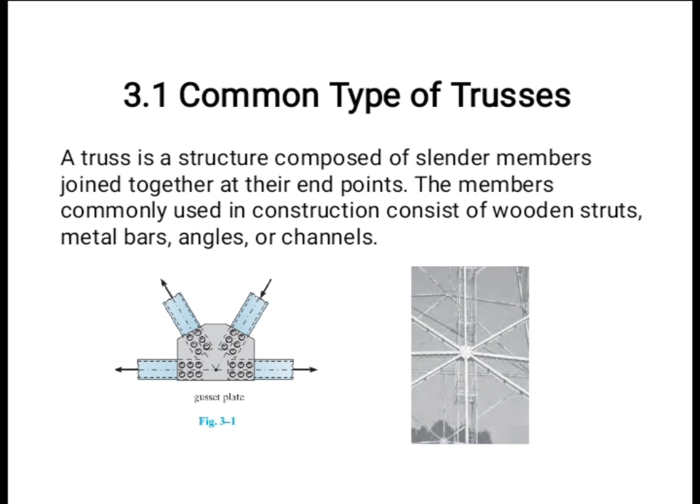The joint connections are usually formed by bolting or welding the end of the members to a common plate called a gusset plate, as shown in Figure 3.1, or by simply passing a large bolt or pin through each of the members. Planar trusses lie in a single plane and are often used to support roofs and bridges. A gusset plate is also used to connect members of the truss supporting structure for a water tank.

Roof trusses are often used as part of an industrial building frame, such as the one shown in Figure 3.2. Here, the roof load is transmitted to a truss at the joints by means of a series of purlins. The roof truss, along with its supporting columns, is termed a bent.

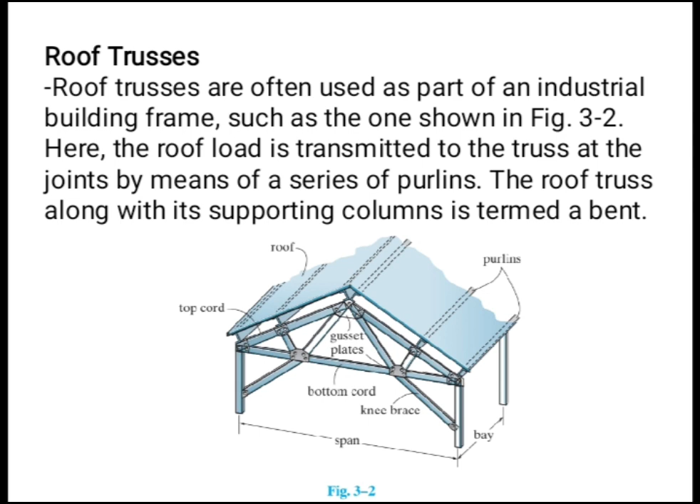Ordinarily, roof trusses are supported either by columns of wood, steel, or reinforced concrete, or by masonry walls, to keep the bent rigid and thereby capable of resisting horizontal wind force. Knee braces are sometimes used at the supporting columns. The space between adjacent bents is called a bay.

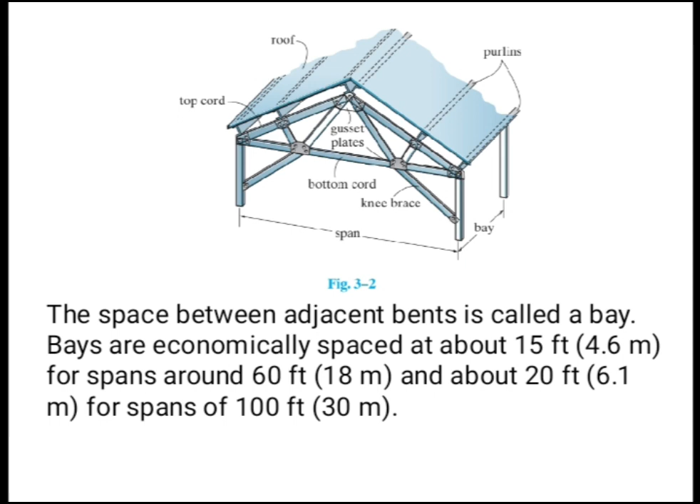Bays are economically spaced at about 15 feet or 4.6 meters for spans around 60 feet (18 meters), and about 20 feet (6.1 meters) for spans of 100 feet (30 meters). Bays are often tied together using diagonal bracing in order to maintain rigidity of the building structure. So these are the common types of roof trusses.

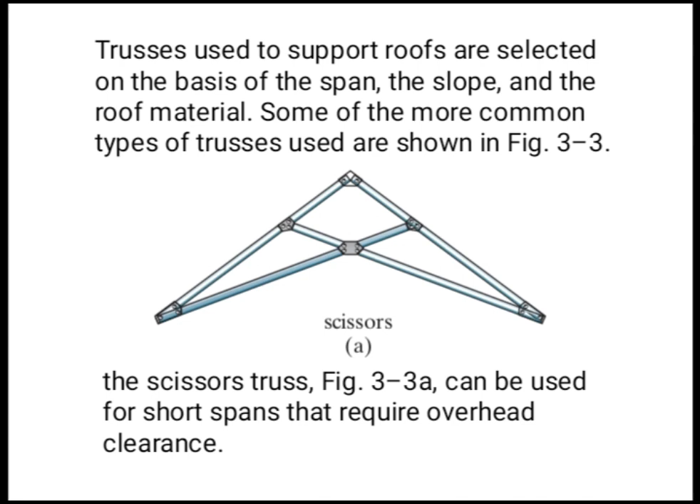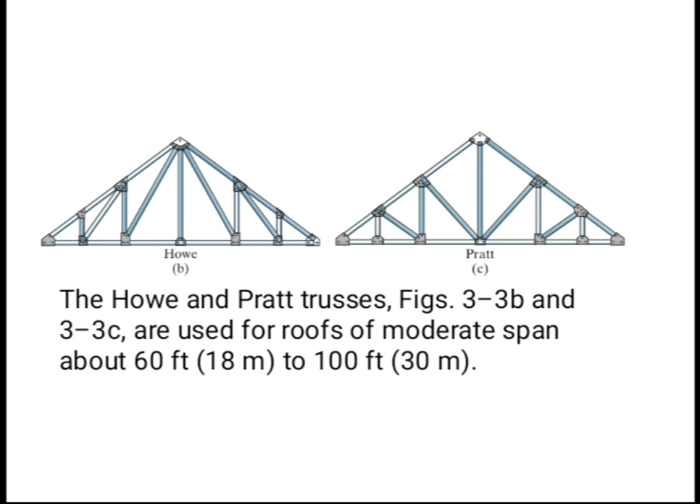Trusses used to support the roof are selected based on span, slope, and roof material. Some of the more common types of trusses are shown in Figure 3.3. In particular, the scissors truss, Figure 3.3A, can be used for short spans that require overhead clearance. The Howe and Pratt trusses, Figures 3.3B and 3.3C, are used for roofs of moderate span, about 60 feet (18 meters) to 100 feet (30 meters).

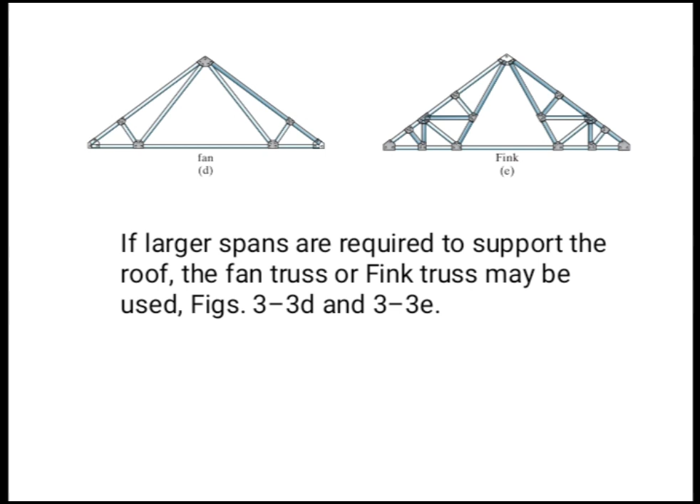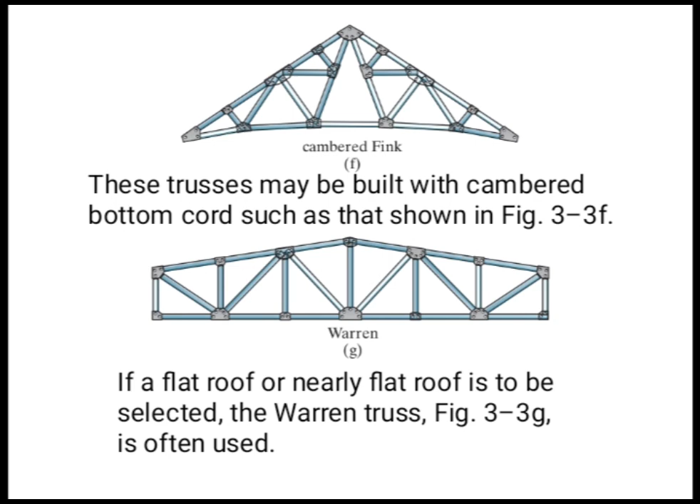If larger spans are required to support the roof, the fan truss or Fink truss may be used, Figures 3.3D and 3.3E. These trusses may be built with a cambered bottom chord, such as that shown in Figure 3.3F. If a flat or nearly flat roof is to be selected, the Warren truss, Figure 3.3G, is often used. Also, the Howe and Pratt trusses may be modified for flat roofs.

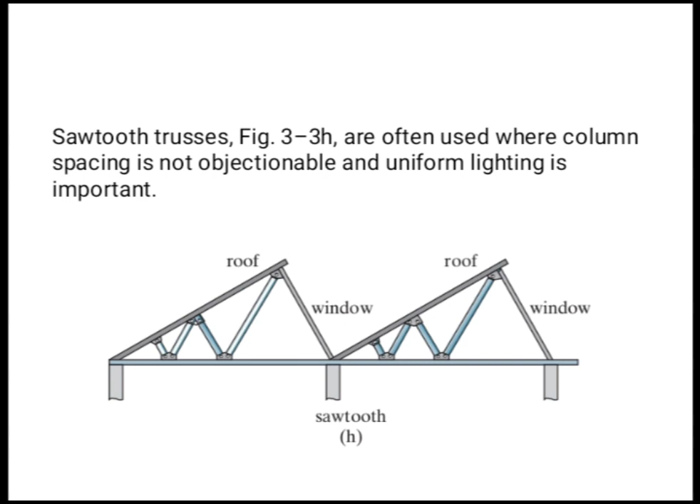Sawtooth trusses, Figure 3.3H, are often used where column spacing is not objectionable and uniform lighting is important, such as in a textile mill. The bowstring truss, Figure 3.3I, is sometimes selected for garages and small airplane hangars, and the arch truss, Figure 3.3J, although relatively expensive, can be used for high rises and long spans such as field houses, gymnasiums, and so on.

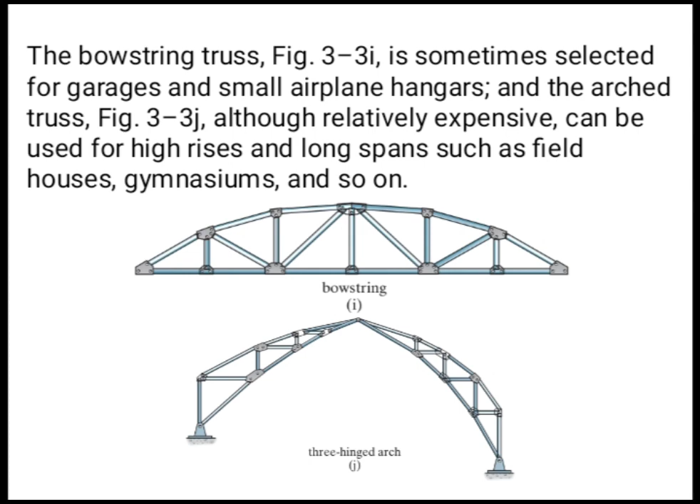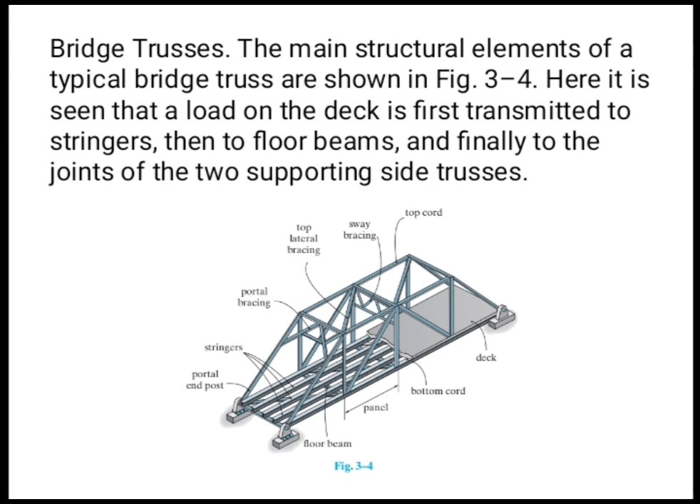Bridge trusses: the main structural elements of a typical bridge truss are shown in Figure 3.4. Here it is seen that a load on the deck is first transmitted to stringers, then to floor beams, and finally to the joints of the two supporting side trusses. The top and bottom chords of these side trusses are connected by top and bottom lateral bracing, which serves to resist the lateral forces caused by wind and the sidesway caused by moving vehicles on the bridge.

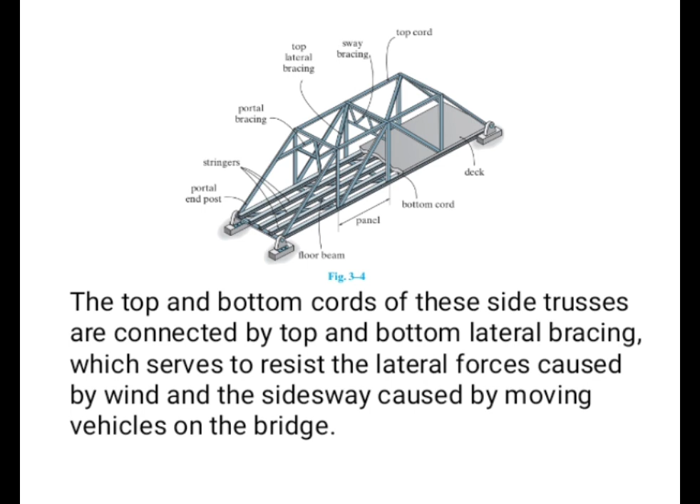Additionally, stability is provided by the portal and sway bracing, as in the case of many long span trusses. A roller is provided at one end of a bridge truss to allow for thermal expansion.

These are the common types of bridge trusses. A few typical forms of bridge trusses currently used for single spans are shown in figure 3 of 5. In particular, the Pratt, Howe, and Warren trusses are normally used for spans up to 200 feet (61 meters) in length. The most common form is the Warren truss with verticals, figure 3 of 5C.

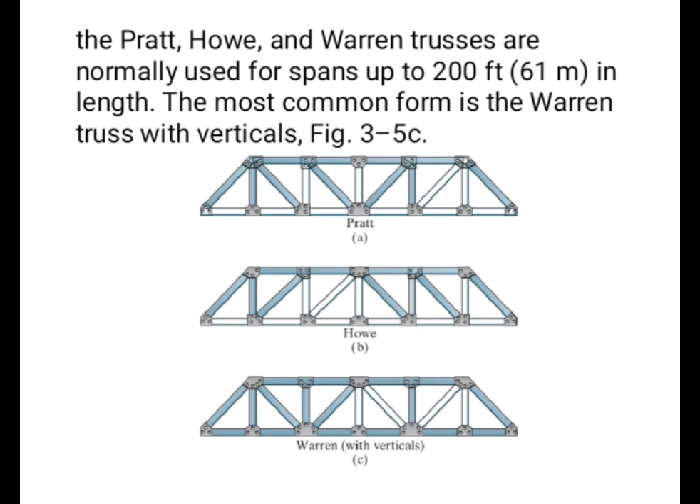For larger spans, a truss with a polygonal upper chord, such as the Parker truss, figure 3 of 5D, is used for some savings in material. The Warren truss with verticals can also be fabricated in this manner for spans up to 300 feet (91 meters).

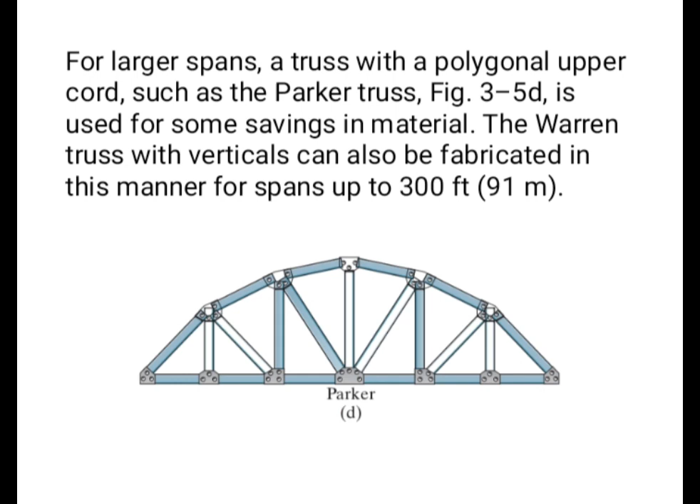The greatest economy of material is obtained if the diagonals have a slope between 45 and 60 degrees with the horizontal. If this rule is maintained, then for spans greater than 300 feet (91 meters), the depth of the truss must increase, and consequently the panels will get longer.

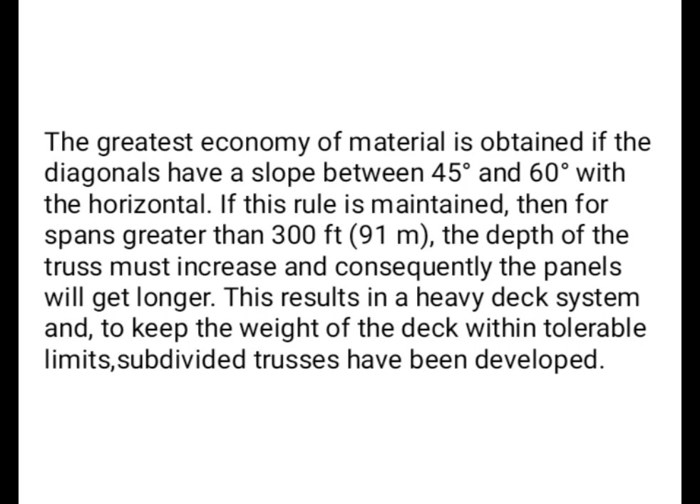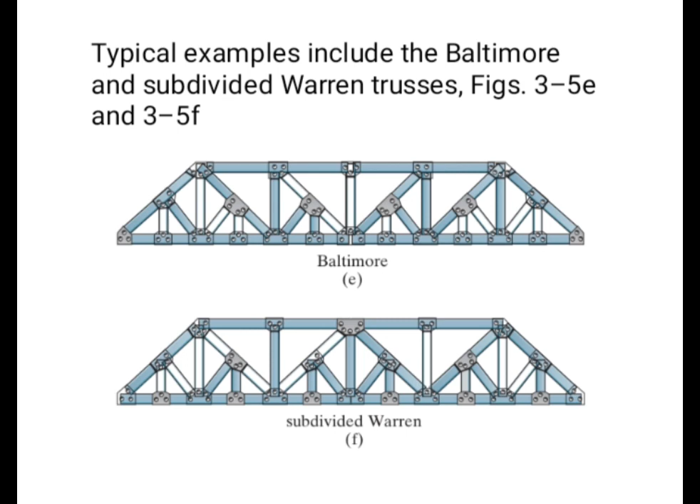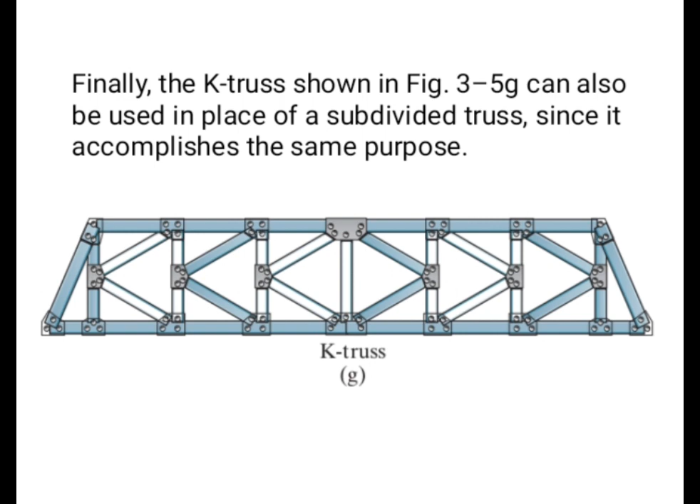This results in a heavy deck system, and to keep the weight of the deck within tolerable limits, subdivided trusses have been developed. Typical examples include the Baltimore and subdivided Warren trusses, figures 3 of 5E and 3 of 5F. Finally, the K-truss shown in figure 3 of 5G can also be used in place of a subdivided truss, since it accomplishes the same purpose.

Assumptions for design. To design both the members and the connections of a truss, it is first necessary to determine the force developed in each member when the truss is subjected to a given loading. In this regard, two important assumptions will be made in order to idealize the truss.

The first assumption: the members are joined together by smooth pins. In cases where bolted or welded joint connections are used, this assumption is generally satisfactory provided the center lines of the joining members are concurrent at a point, as in figure 3 of 1.

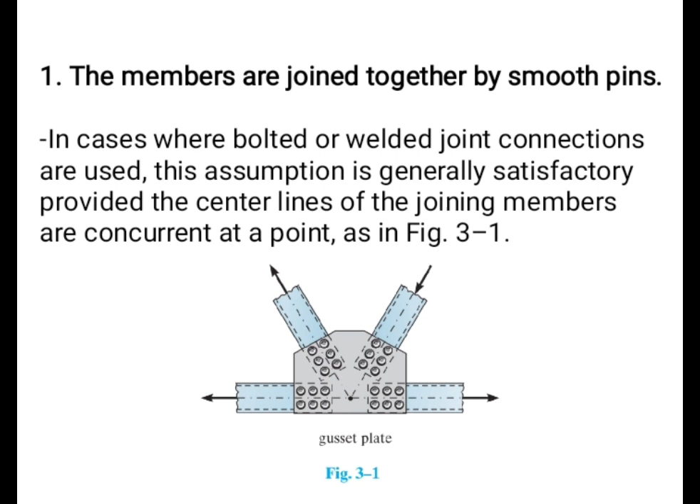It should be realized, however, that the actual connections do give some rigidity to the joint, and this in turn introduces bending of the connected members when the truss is subjected to a load. The bending stress developed in the members is called secondary stress, whereas the stress in the members of the idealized truss having pin-connected joints is called primary stress.

The secondary stress analysis of a truss can be performed using a computer, as discussed in chapter 16. For some types of truss geometries, these stresses may be large.

For the second assumption, all loadings are applied at the joints. In most situations, such as for bridge and roof trusses, this assumption is true. Frequently, in the force analysis, the weight of the members is neglected since the force supported by the members is large in comparison with their weight.

If the weight is to be included in the analysis, it is generally satisfactory to apply it as a vertical force, half of its magnitude applied at each end of the member.

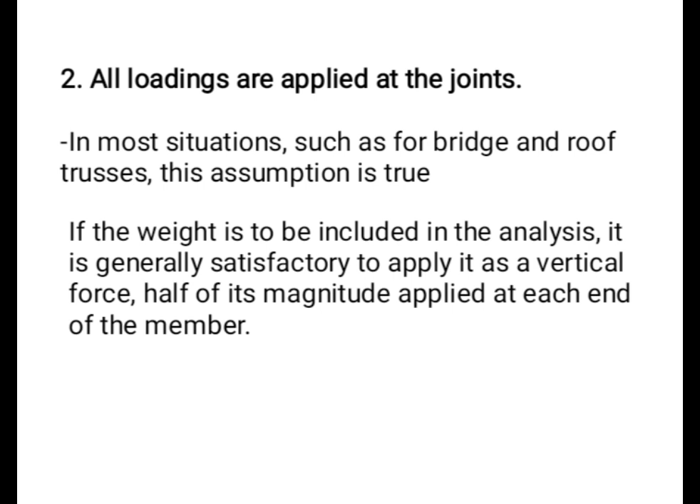Because of these two assumptions, each truss member acts as an axial force member, and therefore the forces acting at the ends of the member must be directed along the axis of the member.

If the force tends to elongate the member, it is a tensile force, figure 3-6a, whereas if the force tends to shorten the member, it is a compressive force, figure 3-6b. In the actual design of a truss, it is important to state whether the force is tensile or compressive.

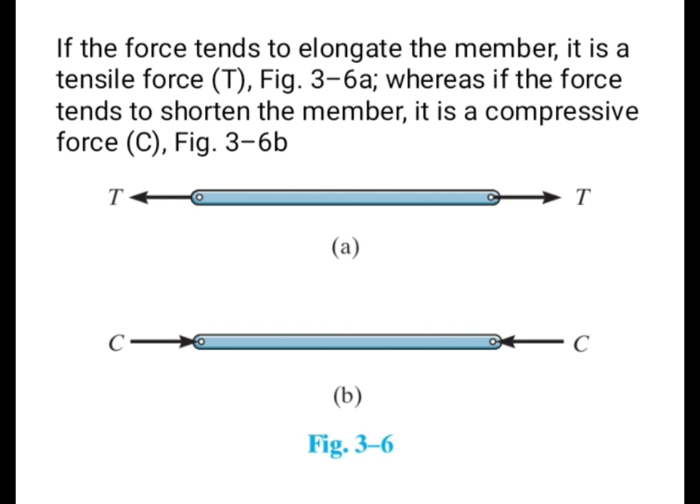Most often, compression members must be made thicker than tension members because of the buckling or sudden instability that may occur in compression members. And that's all for chapter 3.1, common types of trusses.